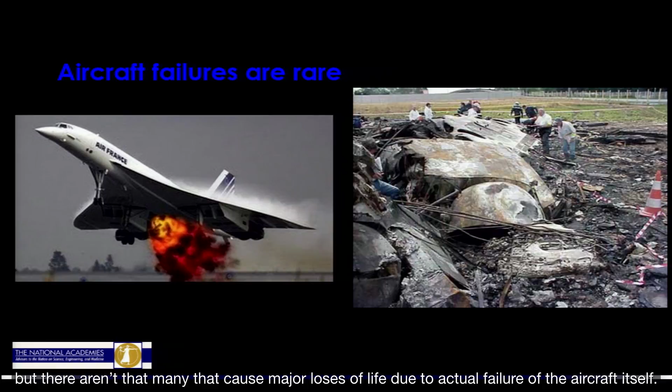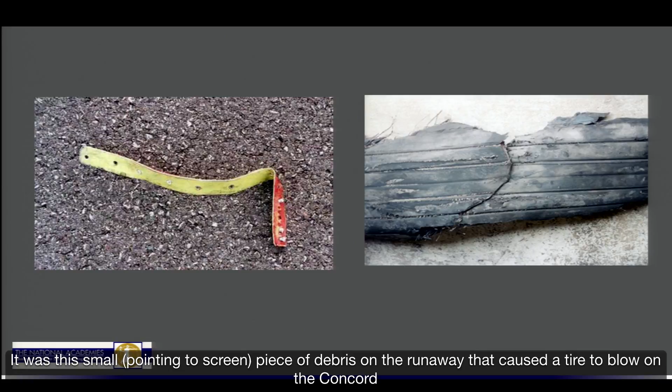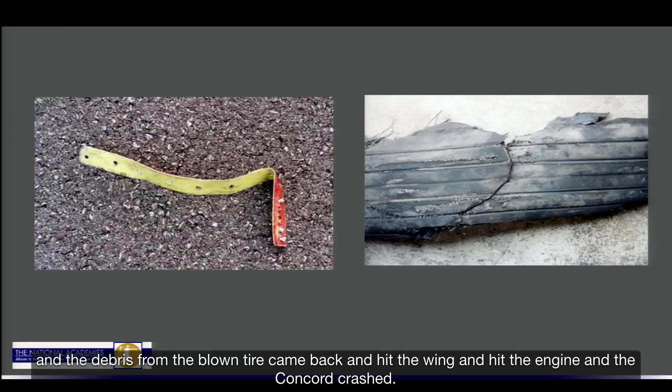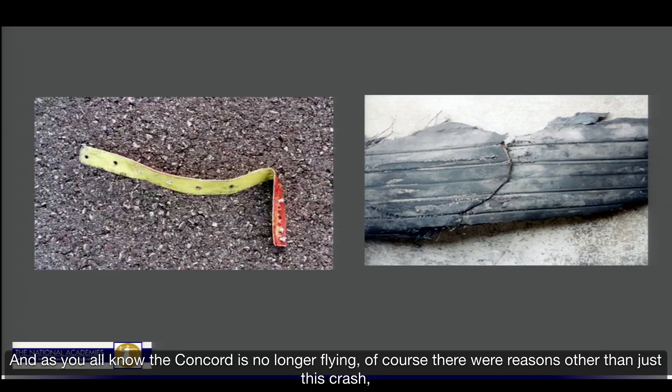This was a Concorde crash that happened in July 2000, taking off on a runway at Charles de Gaulle. This brings up a point Assistant Secretary Schneider made, from the standpoint that I believe everyone on this plane died. It was a small piece of debris on the runway that caused a tire to blow on the Concorde, and the debris from the blown tire came back and hit the wing and the engine, and the Concorde crashed. As you all know, the Concorde is no longer flying. There were other reasons besides this crash, but it was the beginning of the end for the Concorde.

So it's sometimes little things that can cause problems. Another example of simple things causing disasters - the Assistant Secretary said a bolt is a simple thing. Another example is an O-ring. Everyone recalls the Challenger disaster that began with a very simple thing, an O-ring. These O-rings on the Morton Thiokol solid rocket boosters were tested under certain conditions, but here was a very unusual condition where they had freezing temperatures in Cape Canaveral, Florida. So here was a situation where these were operating outside their normal operating conditions, and they had not been thoroughly tested outside of these conditions. Again, it was a failure in testing.

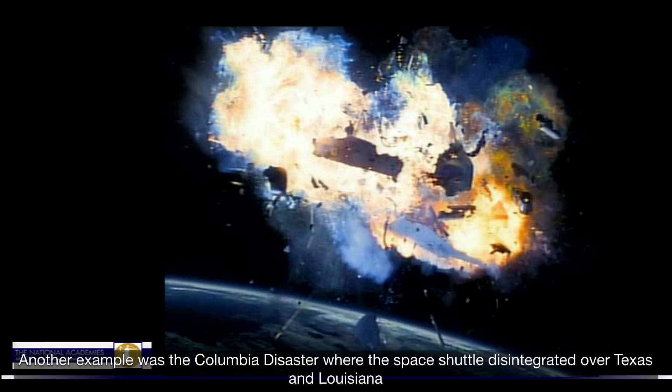Another example was the Columbia disaster, where the space shuttle disintegrated over Texas and Louisiana, and the problem was traced back to the launch, where a piece of foam insulation broke off the external tank and struck the left wing of the orbiter. At that point, it caused damage to its thermal shielding, which could not have been repaired in flight, and caused problems on reentry.

Now let's turn to the ocean and compare some of these problems, because I want to make the point that some of the problems we have to face in actually tracking down failure modes in the ocean can be more difficult than making something like the Challenger or the space shuttle flight safe. So let's look at ocean versus space in terms of power and the problems we have to face.

If you want to power a spacecraft, all you have to do is put solar panels on them, unfurl them, and you've got power in space. If you're working under the sea and you want to power something, you've got a very difficult problem, because you cannot just use solar panels - solar energy does not propagate underwater. So instead you either have to use batteries, cables, or some other way. Submarines use nuclear reactors. Getting power into the deep sea is much more difficult, and many of the failures we have in the deep sea have to do with power failures, either lithium battery failures or failures of power systems, batteries running out. This is something we don't have in space to the same degree that we have under the ocean. So the advantage is definitely in space in terms of dealing with power systems.

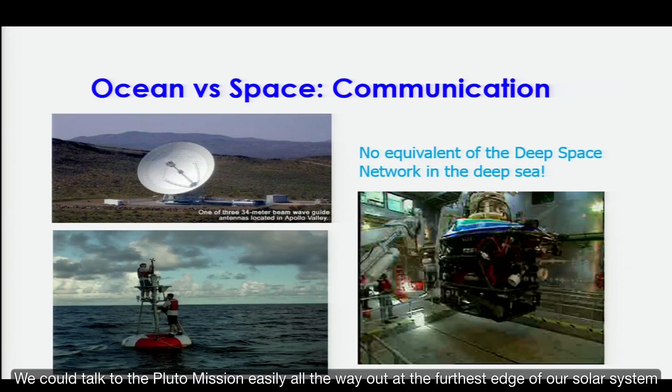If we look at communications, again the advantage is in space. Electromagnetic signals travel easily to space - we could talk to the Pluto mission easily all the way out at the furthest edge of our solar system, whereas it is very difficult to communicate to anything underwater because electromagnetic signals do not communicate underwater. We have to use cables, we have to use sonar, which has much lower bandwidth. So the advantage is to space in trying to communicate. We can have communication failures when cables break, we have multipathing effects, we have all sorts of difficulties communicating underwater, and a lot of failures happen. Sometimes we have problems determining what actually was the failure mode because of problems in communication. So that's why there are difficulties underwater compared to space.

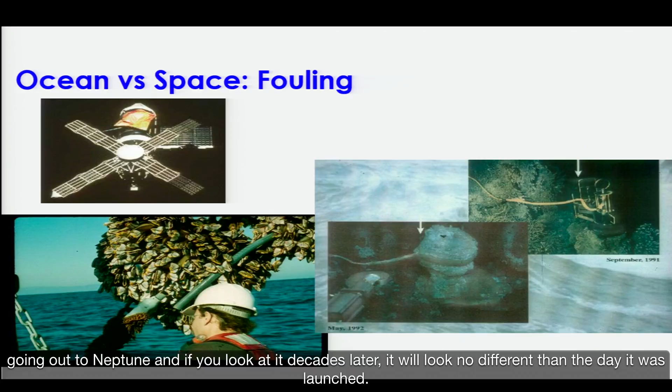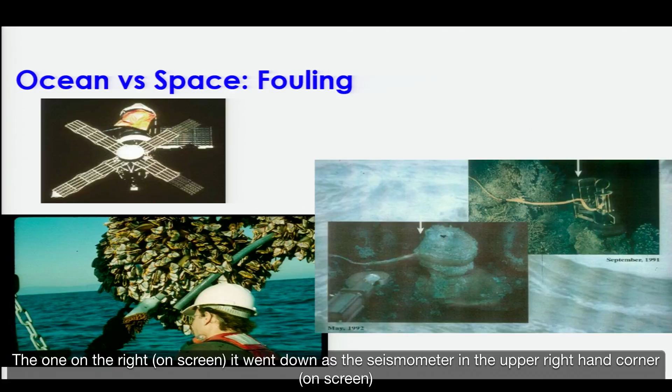So there's biofouling and there's geofouling that happens in the ocean, which makes it very, very difficult. There's corrosion that happens in the ocean, there's deposition, and there's biofouling. So all of those make it much easier to put something in space and expect to get it back looking like it did. That never happens in the ocean. There's corrosion, there's deposition, and there's biofouling. So again, the advantage is space in terms of anything that happens chemically, biologically, and physically.

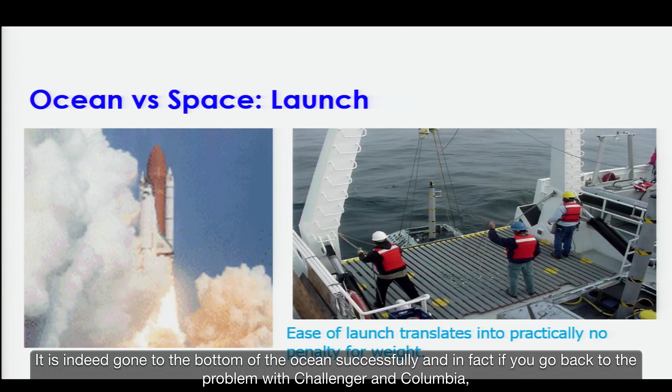Now, the one place where oceans have the advantage is in the launch. Every time I've gone out to sea and thrown something over the side of the ship, we've had a successful launch - it has indeed gone to the bottom of the ocean successfully. And in fact, if you go back to the problems with the Challenger and Columbia, both of those can be traced to problems at launch - the O-ring failure and the foam insulation failure. Both of those were actually problems at launch. And so the ease of launch translates into practically no penalty for weight in the oceans as compared to space. So the one thing we can say is that oceans do have an advantage on the launch, and that's about the only advantage that they do have.

Okay, so does that mean that all of these translate into much more difficulty - should we throw our hands up in the air and say that we can't solve these problems in the ocean? Or was Nancy Leveson right that there is a systematic way we can go and solve these problems in the ocean?

Well, one point that Nancy made was she brought up this man, Admiral Rickover. Admiral Rickover was basically the father of the Navy's nuclear fleet. For 30 years, he oversaw the development and advancement of the US Navy's nuclear submarine fleet. In particular, I recall in 1963 when the Navy's quietest and fastest submarine, the Thresher, was lost with 129 hands aboard during one of its testing cruises.

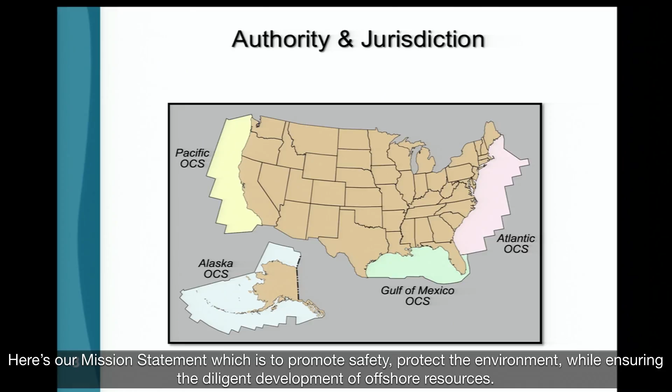We have broad jurisdiction over federal offshore lands. We have more than 800 people located in Washington, D.C., Louisiana, Texas, California, and Alaska.

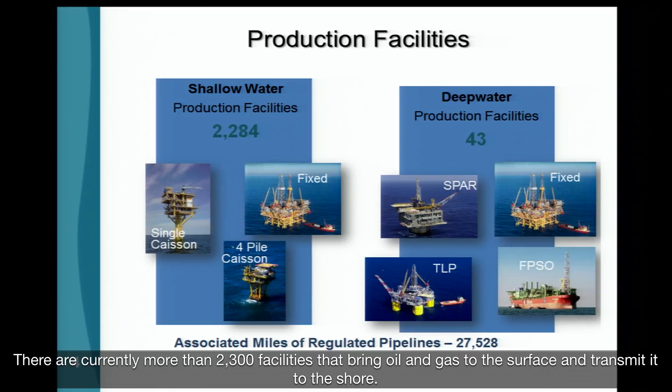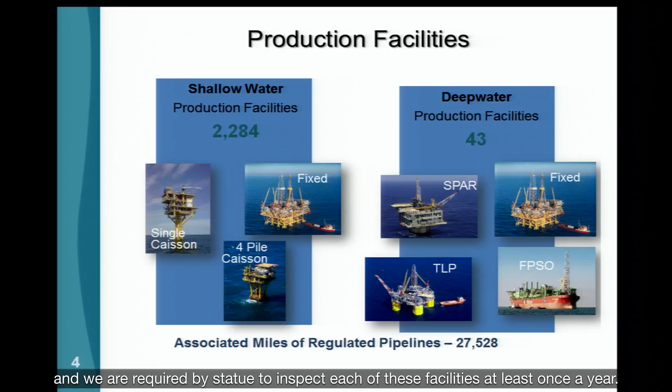There are currently more than 2,300 facilities that bring oil and gas to the surface and transmit it to shore. These facilities produce almost 20% of our domestic crude oil production. They range from relatively simple structures located in shallow water to billion-dollar deep water projects. And we are required by statute to inspect each of these facilities at least once a year.

We are also responsible for providing oversight over the drilling rigs that move onto a lease and drill the wells that produce the hydrocarbons. At the end of July, despite low oil and gas prices, we had more than 55 rigs operating in the Gulf of Mexico.

There are 4 general types of drilling rigs that operate on the OCS. They're demonstrated here. For the purpose of today's discussion, we are focused on deep water drilling rigs that use subsea blowout prevention equipment. So that's the semi-submersibles and the drill ships.

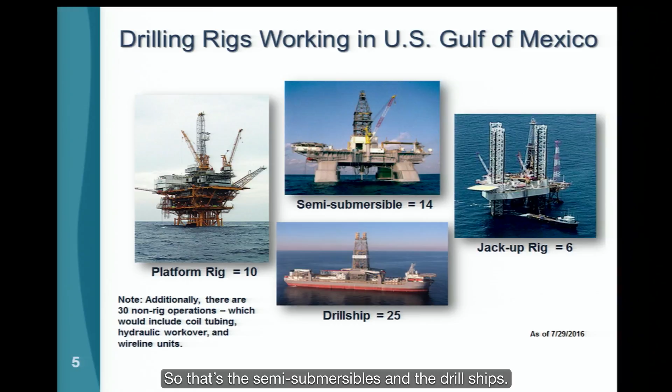Here's a picture of a floating drilling rig. The blowout preventer is located on the seafloor. This equipment is used to confine well fluids to the wellbore, per the definition of API Standard 53, and in an emergency, to shut in the well and prevent a blowout. So when it's needed, this equipment simply has to work.

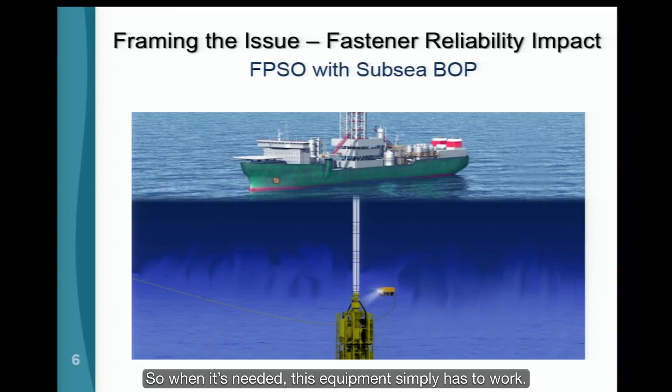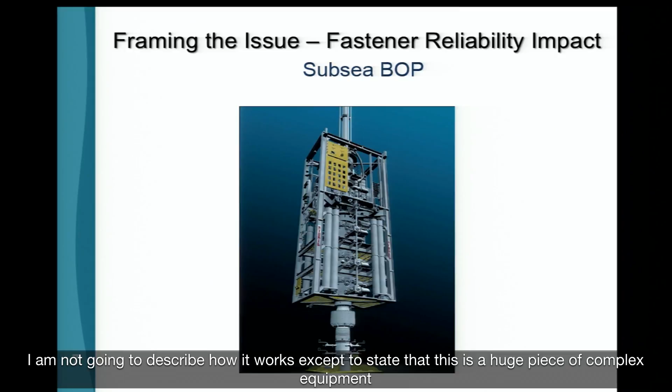And here's a picture of a BOP stack. I'm not going to describe how it works, except to state that this is a huge piece of complex equipment containing multiple components that must work in very challenging environments. Various types of bolts, studs, and fasteners are used to assemble and connect all these components.

As we will be discussing in a moment, there appears to be issues with the various fasteners used in this equipment. As noted before, the fact that we are experiencing problems with what was assumed to be the simplest component in a complex system is troubling to BSEE and the reason for this forum.

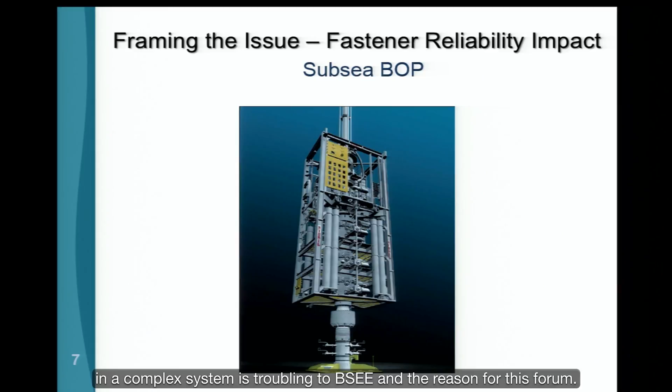2 other items for consideration before we get started. First, this equipment and these drilling rigs are moved from lease to lease and often moved to other areas of the world. As a result, this issue has potential international impacts.

Second, when addressing issues related to this equipment, we have 3 parties involved: the original equipment manufacturer, the drilling contractor who owns the BOPs and performs maintenance and repair, and third, the operator who hires the drilling contractor to drill a specific well. Each of these parties has legal and commercial considerations that complicates the resolution of this issue.

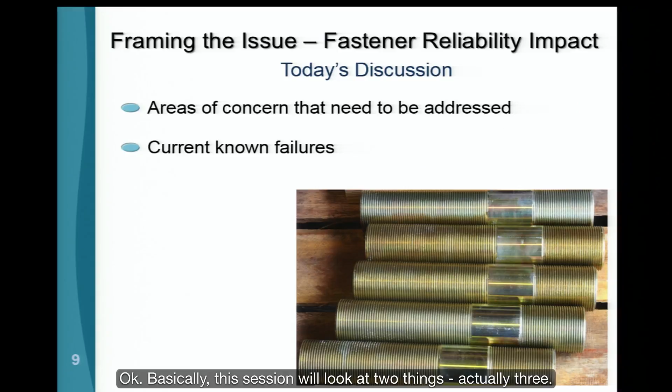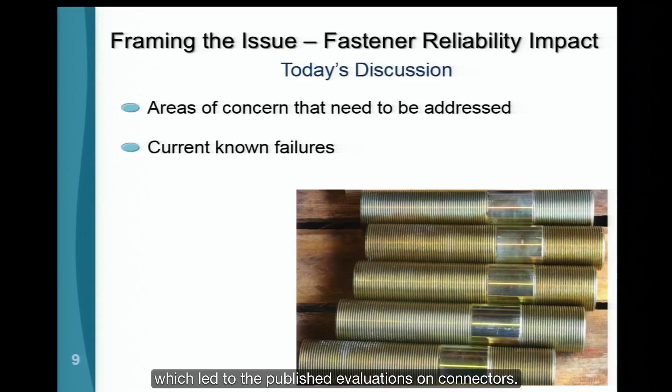Basically, this session will look at three things. First, I'll give you a brief overview of the technical evaluation process that we have put into place, which led to the published evaluations on connectors. Then Troy Trosclair from our New Orleans office will discuss four or five of the connector failures we've experienced, both ones we have reports out on and others we're currently investigating. Then Dr. Hudson will follow up with more details on the various areas of concern the agency has become aware of regarding connector manufacturing, materials, and operational procedures. So that's how this session will go.

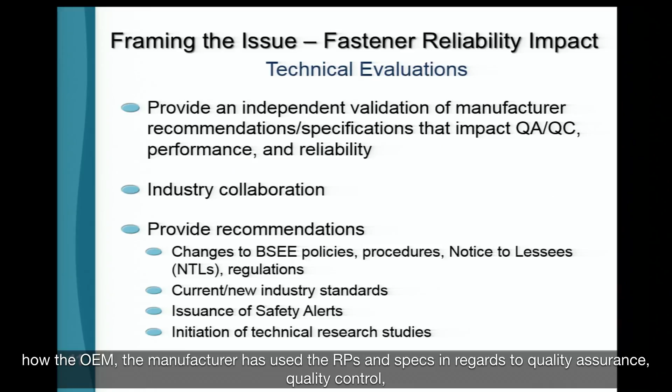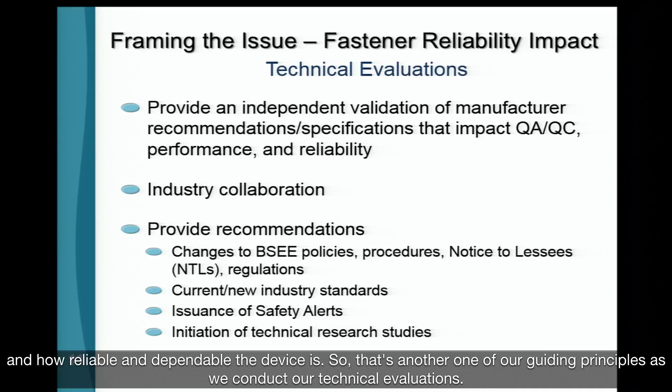Looking further at our technical evaluations, I look at it also as BSEE independently validating how the OEM, the manufacturer, has used the RPs and specs in regards to quality assurance, quality control, in designing and manufacturing the widget, such as a connector. We're also independently validating its ability to perform within the fitness for service requirements I've already mentioned, and how reliable and dependable the device is. So that's another one of our guiding principles as we conduct our technical evaluations.

The second bullet, industry collaboration, is critical. We made the initial assessment on this a few years ago when we first started on our technical evaluations.

If the goal is to improve safety, protect the environment, look at some causes, and share the information with industry to prevent similar occurrences in the future, we felt the best way to do this was not to have the agency conduct these evaluations in a vacuum, but to actively collaborate with our partners. Any of the companies in this room that have been involved in any of the three technical evaluations we've conducted know that we mean what we say here.

We conduct a draft report and send that draft technical evaluation report to the OCS operator, drilling contractor, and OEM separately, and ask for their input and concerns. Then we actually go down and meet with them face-to-face over a series of meetings and discuss the points. That way we feel we end up with the best product because we've listened and tried to address everybody's concerns. I'm not saying we always take every comment, you know, like our rulemaking—we don't—but we definitely listen, and as some of you know, we discuss all your points. So we decided collaboration was key to making this a successful program.

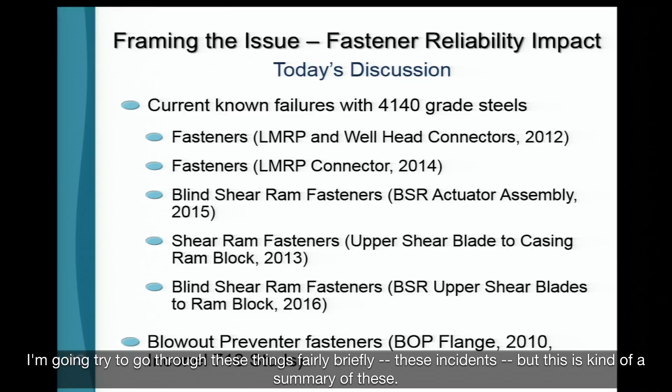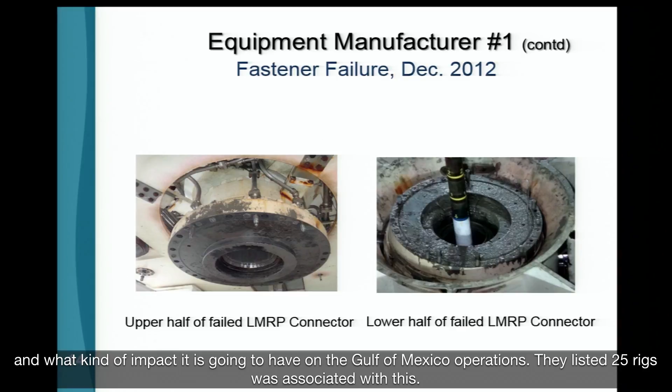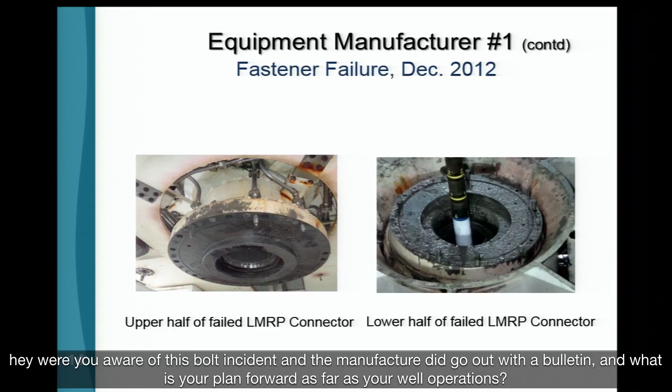They listed 25 rigs was associated with this. So one of the things that BSEE started doing was calling the operators of those contracted rigs and trying to find out, hey, were you aware of this bolt incident? And the manufacturer did go out with a bulletin. And what is your plan forward as far as your well operations?

What wound up happening was BSEE did order the companies to go ahead and T&A the wells at their safe stopping point, pull the stacks, and replace them with other bolts. Dr. Candi Hudson's going to get more into the metallurgy and some of the findings of the bolt issues, but what this one was is I think it was a post-heat treatment of some of the coatings.

So all these rigs had to replace those bolts with the newer bolts. One of the things BSEE also required was a certificate of compliance that the coatings had been post-baked accordingly. We had a third-party certification of that, and we also wanted a third-party certification that the BOP was now fit for service. But one of the main things to look at is this part right here.

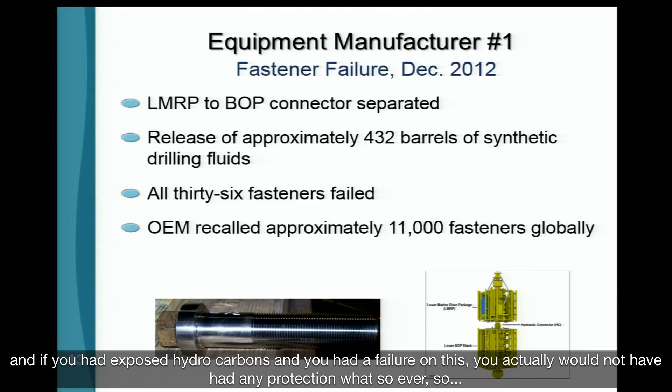If there was a failure and it was a wellhead connector, it could have been a bigger difference. In fact, this well here, they were about 1,500 feet below the 18-inch shoe, so it was a benign hole section that they were in. But it could have easily been a well operation where you actually had exposed hydrocarbons. And if you had exposed hydrocarbons and a failure on this, you would not have had any protection whatsoever.

Next event, June 2014, we had a failure. This one was the actual BOP stack on the deck on the stump, and they were just doing some maintenance in between well maintenance. What they found on that connector was 9 out of the 20 fasteners had failed. This also was an LMRP connector. This was considered a near miss event.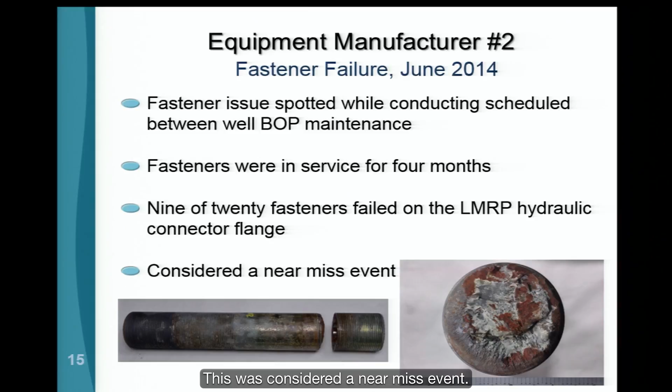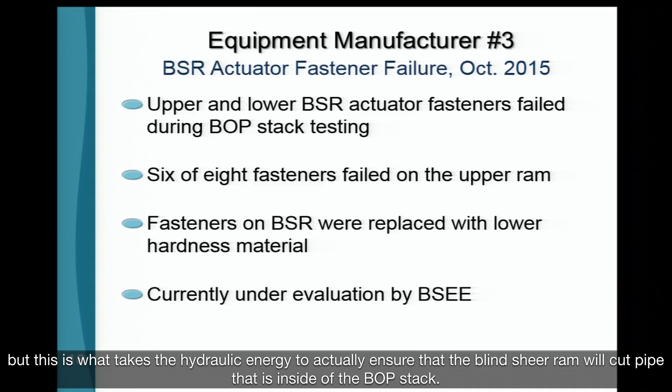This one, on October 2015, the blind shear ram actuator fasteners had failed. A lot of folks call this the booster cylinder, but this is what takes the hydraulic energy to actually ensure that the blind shear ram will cut pipe that's inside of the BOP stack. And this failure, 6 of the 8 fasteners had failed on the upper ram.

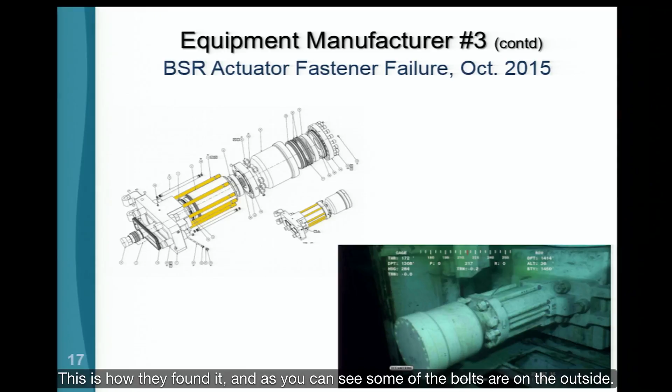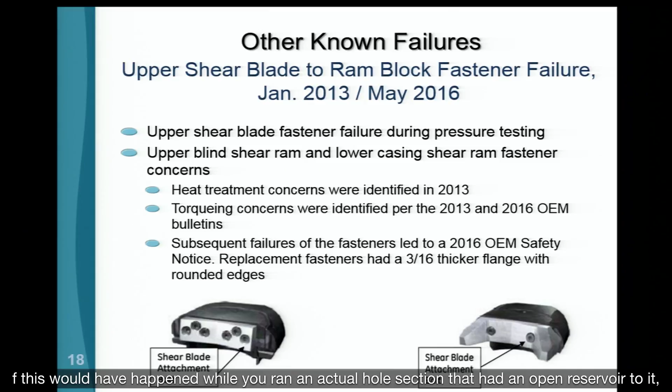So we've had several of these incidents, but fortunately they occurred while on deck doing stump testing. It didn't happen while anything was in service. But this could be the same kind of thing. If this would have happened while you were in an actual hole section that had an open reservoir, we could have a problem. It'd be unprotected. So from here, there were some subsequent failures.

The equipment manufacturer went out with a safety notice, and the fix was to go ahead and reissue new bolts. That was a 3/16 inch thicker flange, and that was the fix on that.

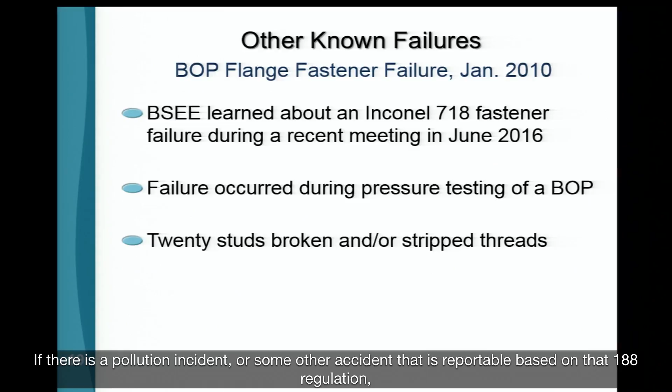One of the things, as BSEE starts looking into these bolt issues, we found out there was a lot of other bolt issues we really didn't know about. It makes sense though, because the only time we're going to find out something is if it's a reportable incident—if there's a pollution incident or some other accident that's reportable based on that 188 regulation. So from that, we found out there were several other fasteners that had failed, and I think the director spoke about some of these.

But that's one of the things I wanted to talk about. Those blade incidents—the way we found out about it was the equipment manufacturer actually sent out a bulletin to the rig contractors. The rig contractors got with the operators, and some operators said, hey, I think BSEE might need to know about these issues. But there was a gap of time there. Some of these bolt failures we didn't find out about until about a month and a half after the incident actually occurred.

Hopefully with the new requirement, the new well control rule—I think it's 250.730 Charlie—requires now these failures to be reported to BSEE, to OORP, to Doug's group. And hopefully we'll be able to reduce that gap of time, so we can be a little bit more proactive as an agency on this and get involved.

One of the other things I wanted to talk about is the impacts.

So for the first one, the LMRP connector, we had 25 rigs affected. Not only that, but after the Deepwater Horizon incident, every deepwater operation was required to have a containment demonstration or containment plan. One of those connectors was associated with the MWCC, one of the containment groups, stack also. So at that time we needed to get that changed out, because that's one of the reasons you're able to go ahead and drill - you have this containment equipment on the beach ready to be deployed.

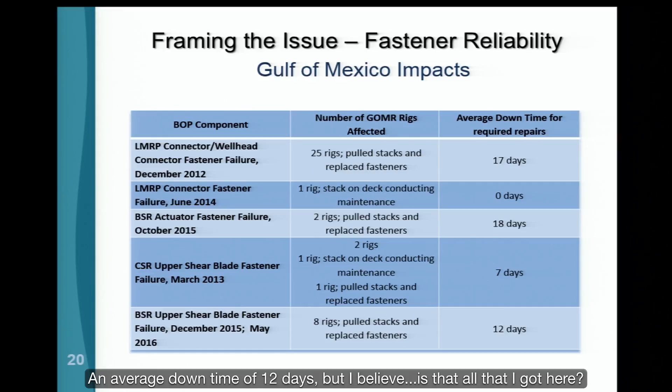But I believe - is that all I got here? Yeah, that's all I have here.

But I just want to echo the sentiments of Assistant Secretary Schneider and Director Salerno, exactly what he stated before, that these incidents - we definitely need to get on top of this, get a hold of it. And this critical piece of equipment, the BOP stack, is our safety equipment for drilling operations subsea. So if we don't get a hold of this, it's quite possible we could have another incident. And as Dr. McNutt stated, failure is not an option, not for industry and not for this agency, and definitely not for this country. So I'll turn it over to Dr.

Candi Hudson - she'll probably get into a little bit more detail of these failures. Appreciate y'all's time.

Thank you, Troy. Yes, Dr. Hudson now will give us an update on some of the areas of concern from our evaluations.

Thank you, Mr. Levine. I'm going to tear off from Troy. Thank you, Troy. I'm going to speak in more detail, in the weeds, about the material-based failures.

I'd like to give a disclaimer also about my accent - I tend to pick up the accents of others. I spent time in the Deep South as well, the Midwest, East Coast, and have a lot of friends from the UK, so I tend to pick up accents.

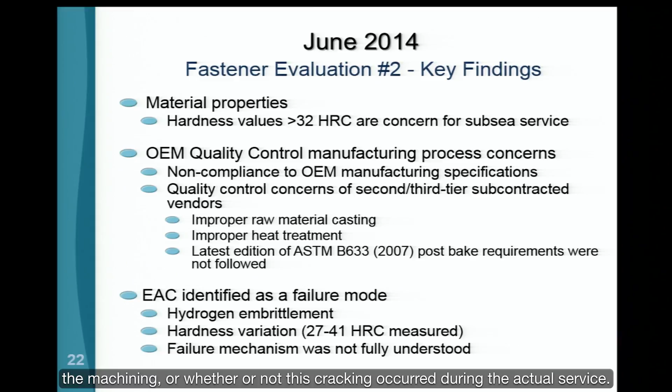I will attempt to use this prompter again. Eureka. I will speak about this and then I'll go back if everyone would bear with me.

Elaborating on some of the other known failures, as Troy spoke earlier, on the upper shear blade to ram block fastener failures, some of the key findings of concern is the installation concerns. Were the fasteners consistently applied in the right torque manner? Some of the fasteners were torqued beyond the material strength, the yield strength per the spec. Also, concerns about the appropriate lubricant, and again, the heat treatment concerns of the actual fasteners.

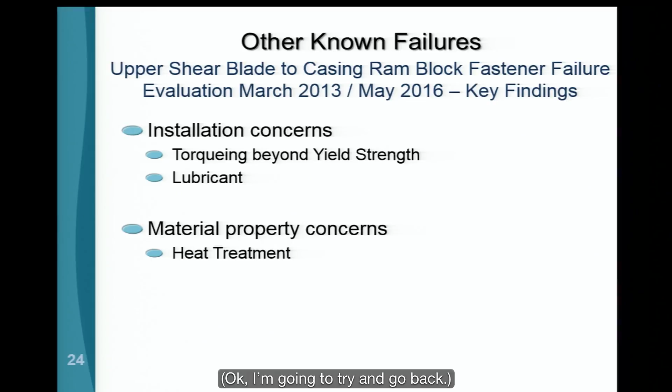Okay, I'm going to try and go back. Okay, it looks like I went forward.

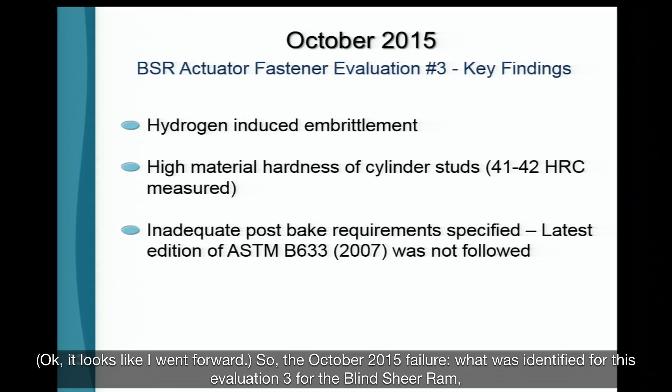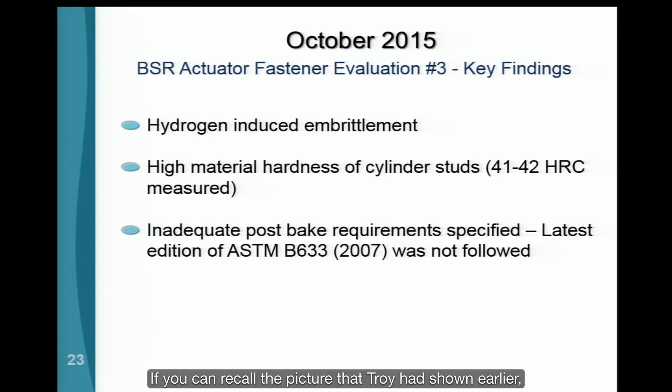So the October 2015 failure. What was identified for this evaluation 3 for the blind shear ram? Again, the failure due to hydrogen-induced embrittlement, high material hardness of the cylinder stud. If you can recall the picture that Troy had shown earlier, what was really concerning is there was a significant high hardness value of 41 to 42 on the Rockwell scale C, and would like to elaborate that this was a 4140 alloy.

Inadequate post-bake procedures were not appropriately followed per the spec, so therefore there are concerns about post-baking after the coating process. Hydrogen may become entrapped in that initial layer and may expand, contributing to the hydrogen-induced failure. So that's also a concern.

Let me try and go back. There we go. Good job. I tend to learn by doing, so I'm actually living up to being an engineer, I see.

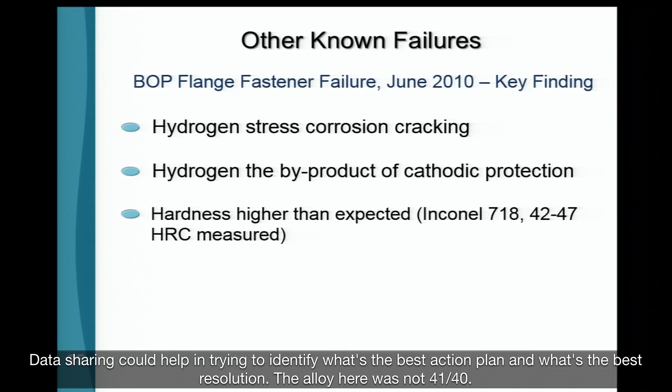The alloy here was not 4140. This was actually an Inconel 718. For those of you in the aerospace industry, you may be familiar that this is one of your common alloys that are used. However, this is not known to be used in some of the oil and gas industry. The hardness values was 42 to 47 Rockwell scale C. As a result, there has been some updates to API industry standard as a result of this.

Again, hydrogen stress corrosion cracking, and the concerns with the hydrogen being the byproduct of the cathodic protection, which promote the free release of hydrogen, therefore diffusing into the material substrate, becoming trapped, and causing the corrosion failure, the stress corrosion cracking.

So, as Joe mentioned, there are basically four areas of concern that were identified. The first one, design standards. What was identified is there are significant gaps among all the applicable industry standards, inconsistent requirements for material properties. As a result, there is a need to have harmonization among the requirements.

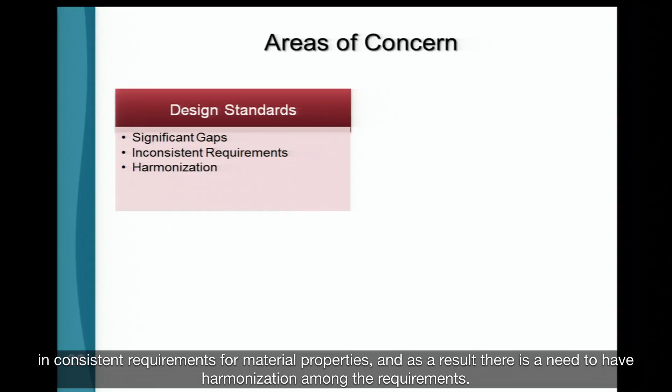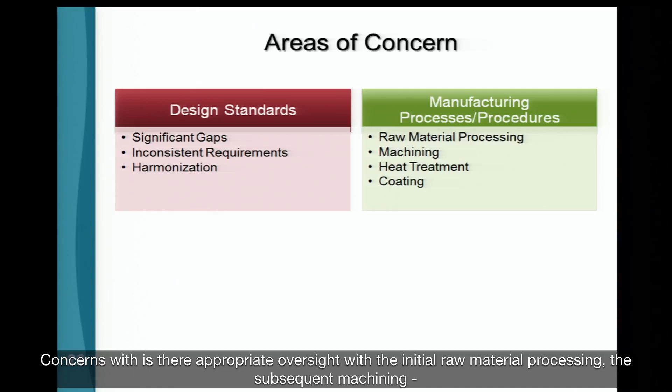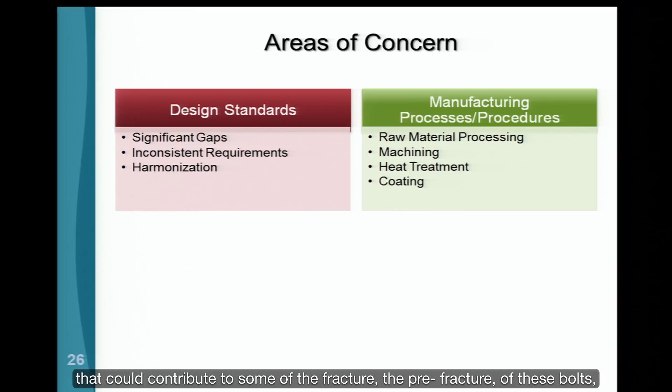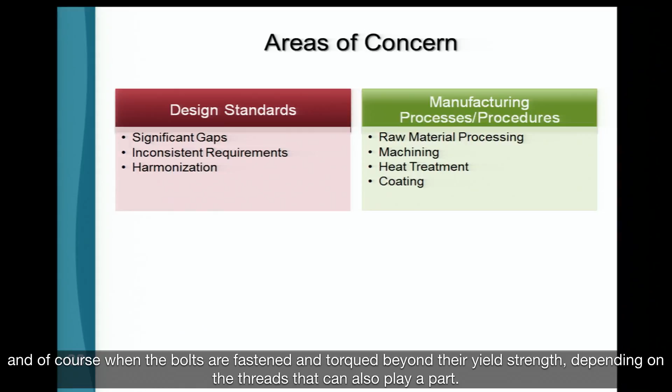The second one is manufacturing processes and procedures. Concerns with, is there appropriate oversight with the initial raw material processing, the subsequent machining? This is one for further study. Would like to suggest for further research. There may be concerns in regards to whether the threads are cut or rolled that can contribute to some of the fracture or the pre-fracture of these bolts. And of course, when the bolts are fastened and torqued beyond their yield strength, depending on the threads, that can also play a part. Heat treatment.

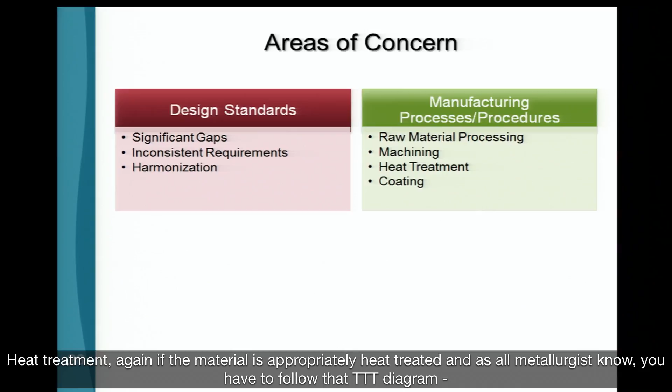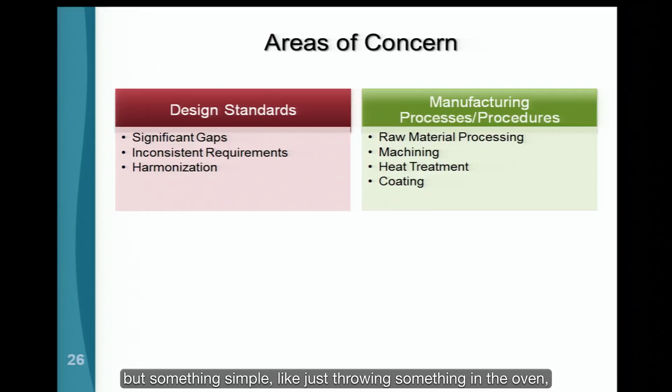Again, if the material is appropriately heat treated, and as all metallurgists know, you have to follow that TTT diagram, time, temperature, transformation. We'll have to thank our thermal instructors about it. But something simple as just throwing something in the oven, you may think it's completely done and heated, but depending on where it is within that furnace, it may not be appropriately cooked on the inside.

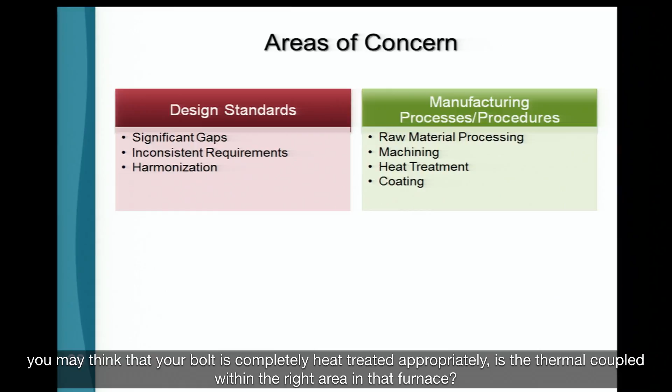I guess the best way I can describe it is you put a cake in the oven, you take it out, it looks like it's completely cooked, but if you stick a toothpick through it, you pull it out, you may have some goo in there. So even though you may think that your bolt is completely heat treated appropriately, is the thermocouple within the right area in that furnace? Is it appropriately heat treated? This may require extra time to actually take a bolt out and do a cross-section and look at the microstructure

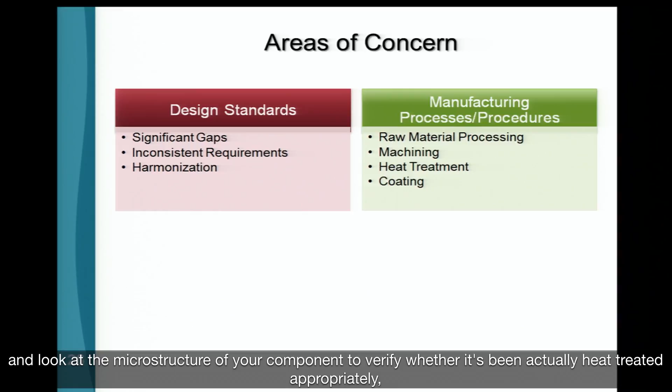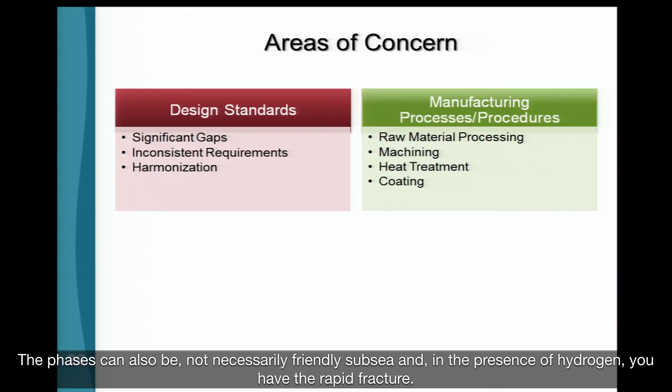of your component to verify whether it's been actually heat treated appropriately. And even before that, once the component has come from the raw material, do you have the appropriate microstructure? Deleterious phases can also be not necessarily friendly subsea. And in the presence of hydrogen, you have the rapid fracture.

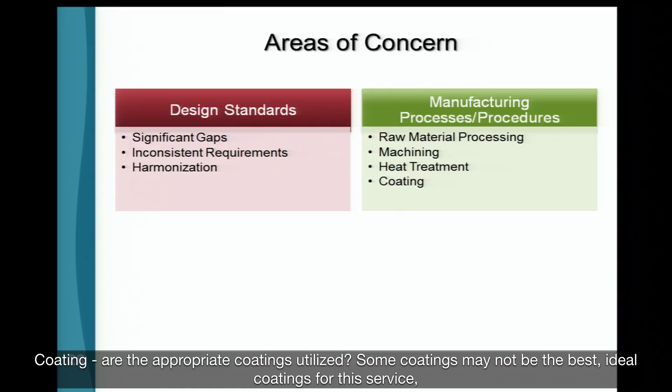Coating, are the appropriate coatings utilized? Some coatings may not be the best ideal coating for this service. Also, is the coating post-bake process appropriately done? Are they appropriately done immediately within that time duration as specified? Is that duration post-bake long enough? I won't get into the details about painting even after coating. That's possibly more in the weeds for task groups, but that's also another concern that was identified. Was those bolts appropriately painted all around? Is that the right paint? Is that the right coating, et cetera?

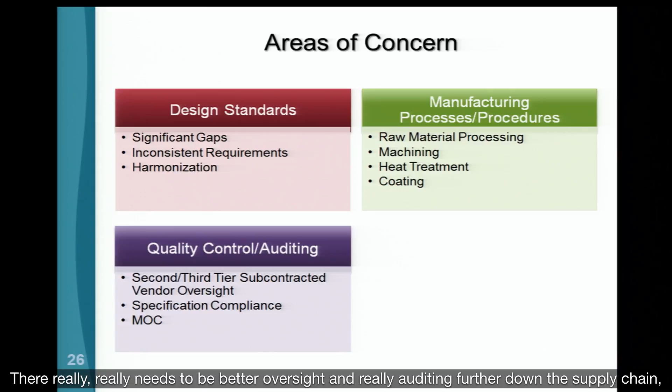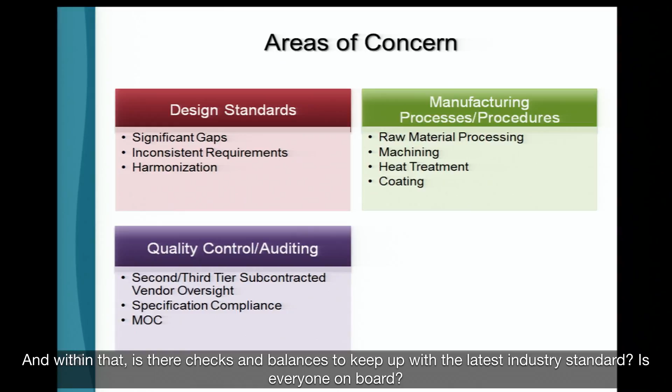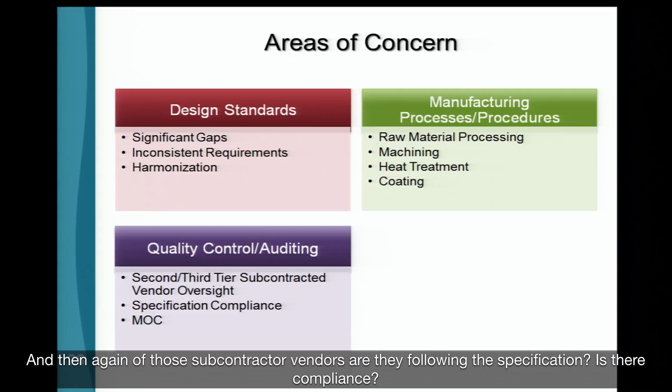Again, I guess I'm sounding like a broken record. Quality control and auditing. There really needs to be better oversight and auditing further down the supply chain, past the first, the second, the third tier, and further down the supply chain. Are they appropriately following the OEM spec? Are they appropriately following the industry standard? And within that, is there checks and balances to keep up with the latest industry standard? Is everyone on board? Is everyone keeping up to date? And how long is that time period to implement the latest industry standard within the OEM spec? And then again, of those subcontracted vendors, are they following the specification, is there compliance? And again, the management of change, that's also of concern.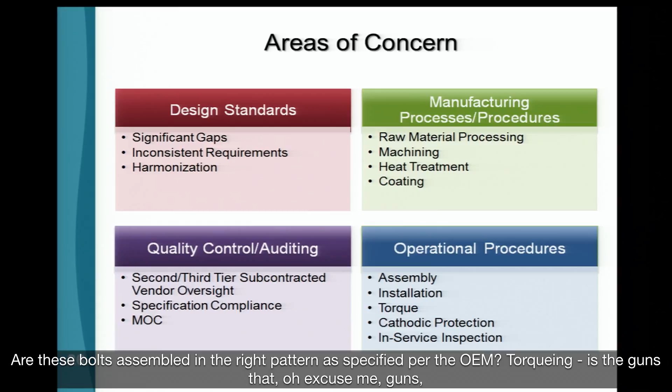Torquing. Is the guns that, sorry, forgive me, I can't help it. I've been around a lot of engineers and auto people, so I tend to speak kind of candidly. I apologize. But are the instruments that are used to install these bolts appropriately calibrated to do the torque procedures?

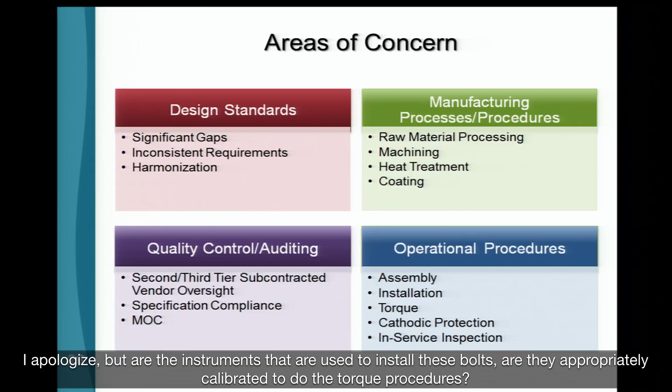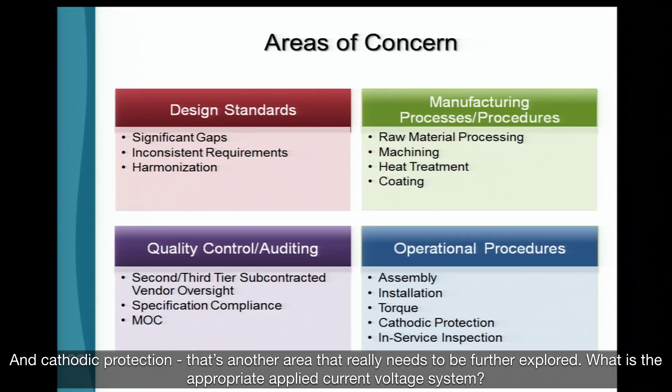And cathodic protection, that's another area that really needs to be further explored. What is the appropriate applied current voltage system? Are the anodes replaced? Are they appropriately inspected when the stack is pulled? How much corrosion is identified on those anodes?

And of course, you have the perfect storm, and I'd like to thank Trent for reiterating this. You have your three circles: your environment, you have the load, and then you have the operation. Then finally highlighting on the operational procedures.

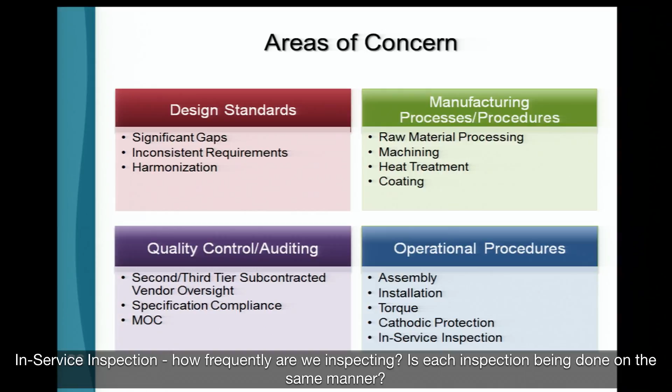The in-service inspection, how frequently are we inspecting? Is each inspection being done in the same manner? How much detail are they being inspected with? That's another concern. And what exactly is considered to be the appropriate data? Is some data just totally thrown out amiss?

I would like to highlight Dr. McNutt with some of the previous failure that was identified for the Concorde. That little small debris from takeoff was the one small component that played a part in that disastrous failure. It could be one small thing that can throw the whole three circles out of sync.

And of course, we need to understand the geographic and geological condition. Where are these components being used? What is the salinity of where the components are being used? And as Joe mentioned, some of these components are used globally and then brought back on the OCS. Is there a proper in-service inspection and maintenance? Does that salinity of what these components have seen in other charted waters play a part?

So highlighting a little bit more on design standards, I would like to note not all of the standards that have an impact are listed. I understand, of course, some of these standards differ between production and drilling, and we understand there are task forces and different groups addressing these concerns. You have your API standards: API 6A, 16A, 16F, 17A, and then recently API 20E, API 20F, API 6A 718, addressing bulk property requirements concerns, but there are significant material property gaps.

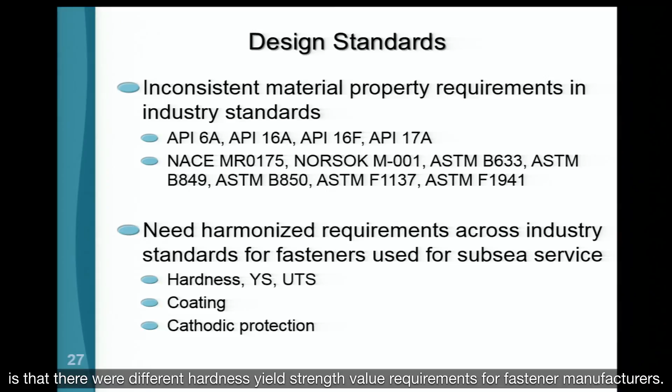They are being addressed, but what BSEE has identified out of the first evaluation is that there were different hardness and yield strength value requirements for fastener manufacturers. The other industry standards, realize that NACE is a very in-depth corrosion standard, but they also have different values and requirements. NACE MR0175, NORSOK M001 - I'd like to emphasize that NORSOK M001 also has different requirements for fasteners that are used with cathodic protection.

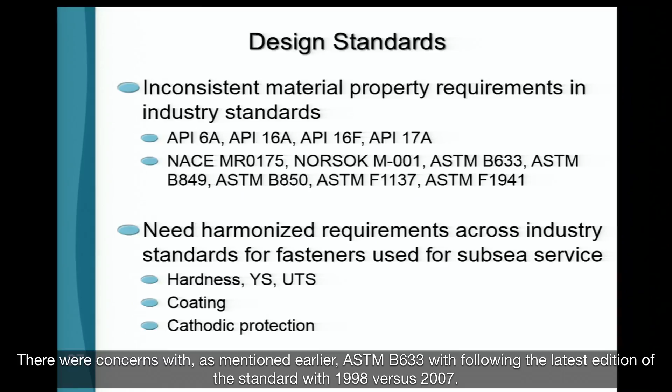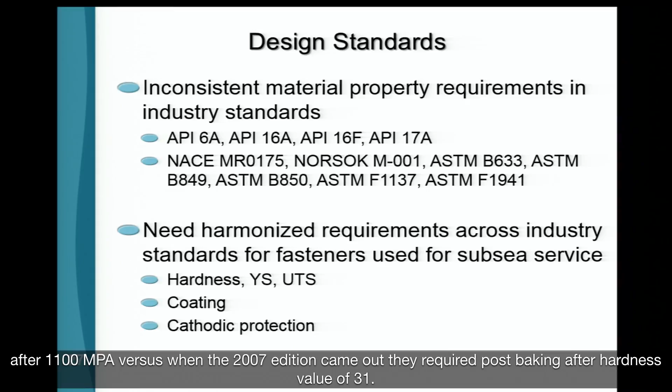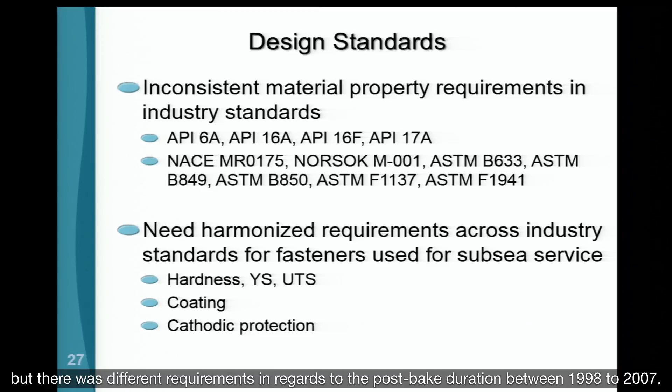There were concerns, as mentioned earlier, with ASTM B633, following the latest edition of the standard, 1998 versus 2007. The 1998 edition had a different strength value requiring post-baking after 1100 MPa, versus the 2007 edition which required post-baking after a hardness value of 31. There were also some different requirements, don't quote me, but there were different requirements regarding the post-bake duration between 1998 and 2007.

There were also different requirements for the pre-bake based on this; there were different requirements for ASTM F1137 and ASTM F1941 for the post-bake versus ASTM B633. ASTM B850 is your post-bake standard.

Again, stressing there is a greater need for consistent, harmonized requirements among industry standards for fasteners used on critical subsea components. And again, stressing harmonization of the hardness, yield strength, ultimate tensile strength, the mechanical material properties, the coatings, and also the cathodic protection.

Realize that the coatings that have been utilized were essentially zinc chromate and zinc phosphate, but this is something for the industry and possibly research studies to look at - exploring alternative coatings like organic coatings. I won't throw out any names at this point, but I'm sure some of the tech experts understand where this is going.

There is really a significant need, I can't emphasize this enough, for quality control of the fastener manufacturing processes and the material properties for critical subsea applications, for this equipment that is being used.

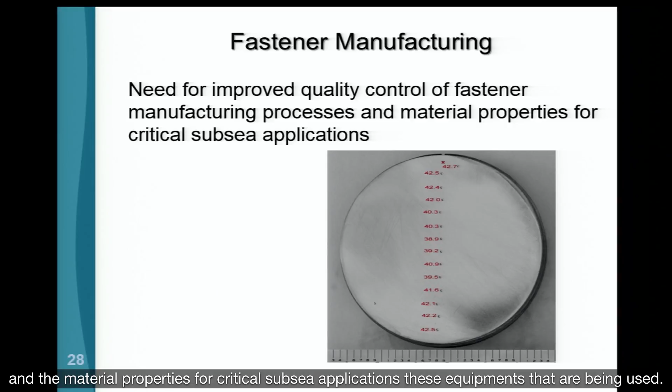Some design factors, as I mentioned earlier, the three components that do play a part in performance reliability: the environment, what these fasteners are incurred and experience under fatigue loading, and the raw material selection.

These processes and procedures also need to be further looked at - what has an impact is the casting of the raw material, the machining processes. Are the appropriate machining processes calibrated, are they followed? And something to add is the rolled versus cut threads.

The heat treatment processes - this goes from the beginning. If these fasteners aren't heat treated appropriately, then they have different resultant material property values. And that goes back to the supply chain, making sure that these subcontracted vendors follow that spec and heat treat appropriately. And again, the coating processes.

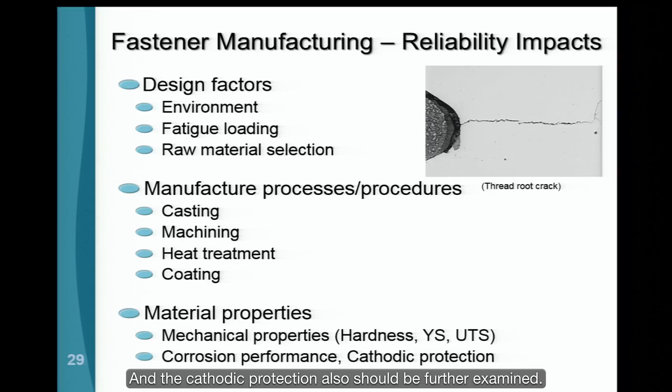Is the appropriate coating used? As such, are they being done to spec? And the cathodic protection should also be further examined.

Again, just emphasizing, there are concerns with auditing only to the first-tier subcontracted vendor. There's concern with subcontracted vendors performing these different processes. Also, keeping up to date and following the use of older standards, and when are these standards being updated? What is that time duration, and what's the legacy for these latest standards being implemented into the OEM specs?

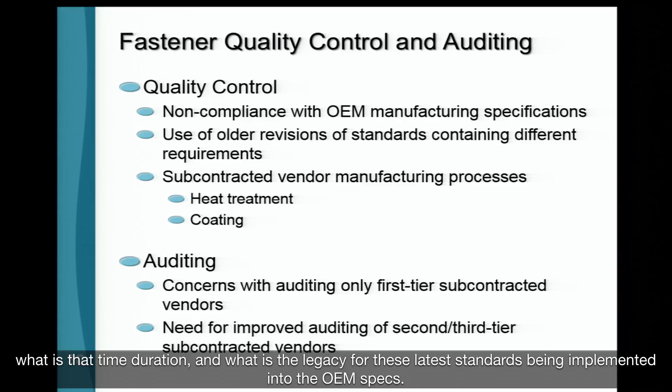Operational procedures. Fastener installation. This impacts the equipment reliability and performance. Is the equipment assembled appropriately? Is it following the required torque procedures? Is the pattern being performed in the installation consistently? Is the appropriate lubricant being utilized per the specification?

As everyone knows, there's all types of lubricant being used. You have your moly coat, et cetera. But in the interest of time, if there's another type of lubricant, that may also be a concern. And is the torque gun calibrated appropriately?

Fastener inspection. Are the BOP fastener inspections done on a periodic basis? As Troy mentioned, there happened to be an identified fastener failure issue when the BOP was brought to surface and on an in-between well maintenance inspection. Should we start inspecting a little bit more frequently? And if so, how many fasteners are being inspected when it's brought to surface? Is it just one, or is it all of them? This should be considered. And are they also being replaced when that stack is brought to surface?

Cathodic protection, that's something that still needs to be further explored and really fully evaluated. This can possibly contribute to the fastener corrosion and degradation if that system is not in sync and aligned. If that sacrificial anode is completely gone, you have more promotion of corrosion, degradation, and acceleration.

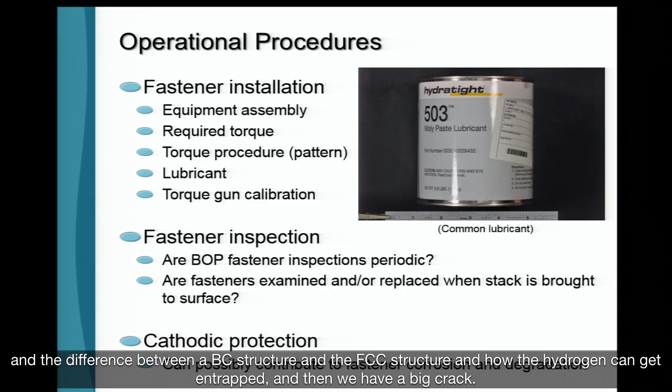I won't get into the science of it, the kinetics and Fick's law of diffusion of the hydrogen ion diffusing into the substrate of the microstructure, and the difference between the BCC structure and the FCC structure and how the hydrogen can get entrapped, and then we have a big crack. I won't get into that, but I'm sure the metallurgists understand the impact of that.

And I'll turn it over to Doug.

Thanks, Candy. Let me summarize session one. We have identified, we believe, an industry-wide issue involving fasteners. It involves different components and different manufacturers. We have 9 different areas of concern or areas for improvement. That includes metallurgical properties, quality assurance processes for manufacturing, cathodic protection.

Furthermore, we're hampered by the lack of data sharing. I think the director mentioned we're aware of failures going back to 2003, but we don't know how many. As I mentioned, we have multiple parties involved, and there are legal and commercial issues that prevent data sharing, but that's definitely an area where we need to improve.